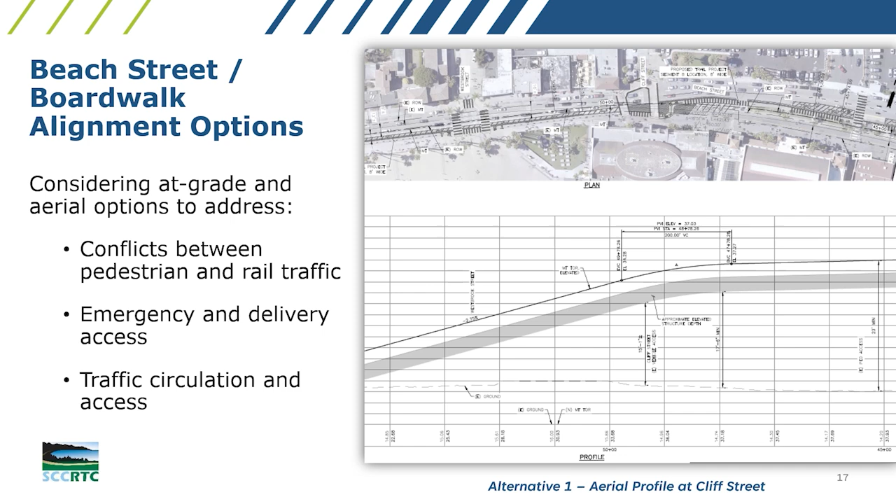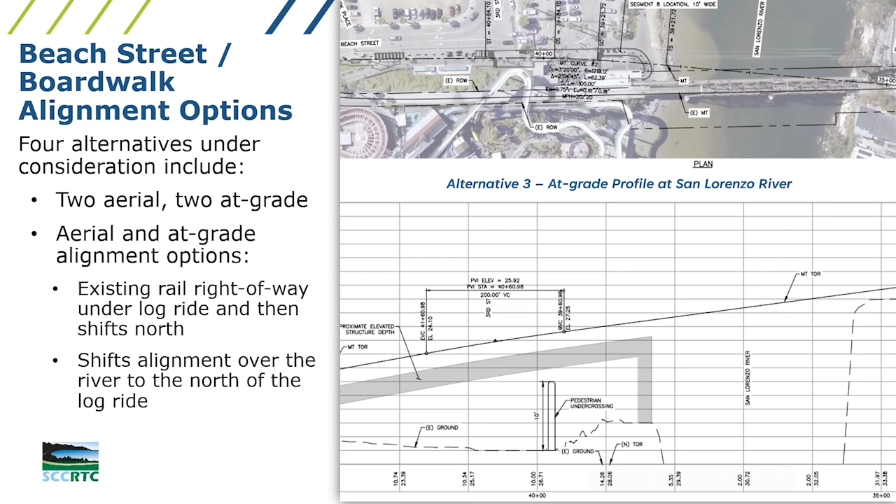In this location, along the boardwalk, we have 4 different alternatives that we're currently evaluating. There are 2 aerial and 2 at grade, one each for an aerial and an at grade, looking first of all at following the existing rail right-of-way under the log ride and then shifting slightly to the north, coming back into Beach Street. And then the second location actually shifting to the north as the railroad crosses the San Lorenzo River to the north side of the boardwalk and continues through in that location to provide more space in front of the boardwalk for a lot of the activities that we were talking about.

These are those alternatives on the map in front of you, looking at both the location where we would stay within the right-of-way, as well as then pushing the railroad further to the north, away from the immediate front door of the boardwalk in that area, opening the space up for more pedestrian circulation, as well as the delivery and emergency access that we talked about a moment ago.

In both of these alternatives, as we move to the west, just past Cliff Street, the railroad stays on the coastal side of Beach Street until it gets over to Pacific and moves back into the dedicated railroad right-of-way to provide for smoother operation of vehicle traffic along Beach Street, as well as in and out of the properties that are on the north side of the street, including the upcoming La Bahia Hotel that is within those blocks.

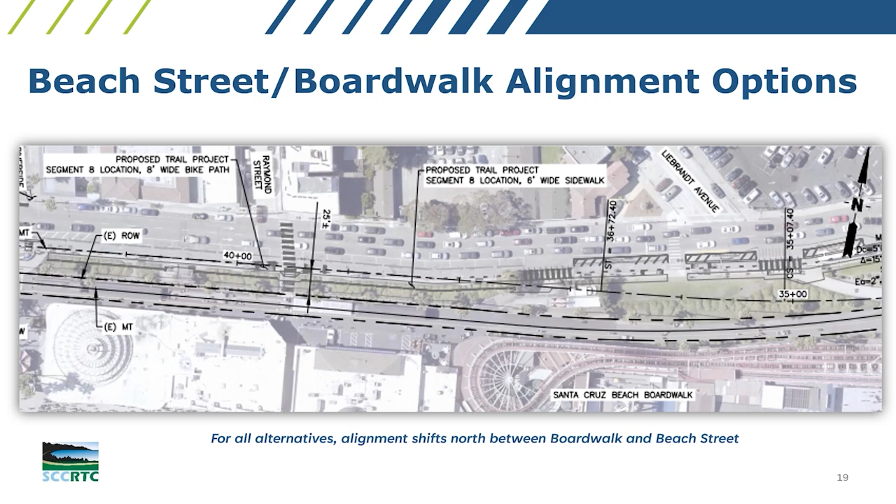In the area of Jade Street Park, we're actually looking at taking the trail out of the railroad right-of-way through this area. For those of you familiar with this area, in the area between 30th and 47th Avenue, we need to provide a high-quality trail, but the railroad right-of-way is very narrow through this area, and so there's some conflicts in terms of being able to provide the needs of both the railroad as well as for the users of the trail.

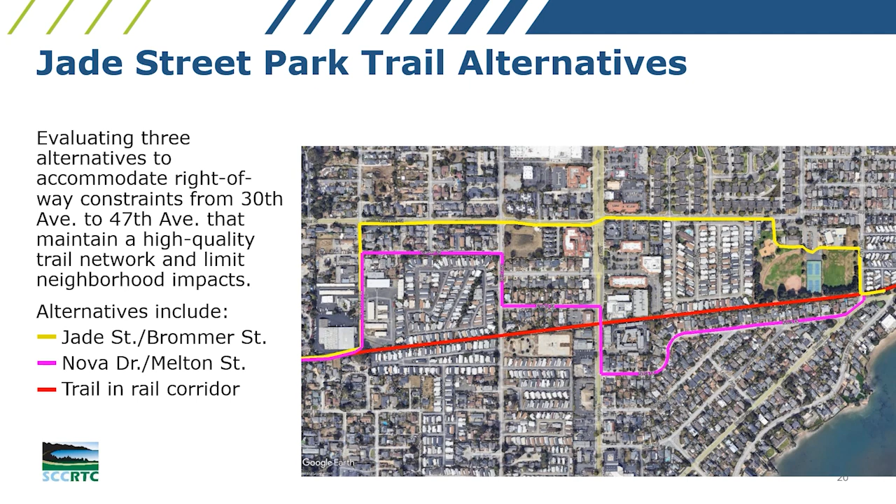So we've got a couple of on-street options that we're considering here that would allow us to provide that high-quality facility for the trail, while also being able to accommodate the railroad within the railroad right-of-way and not having conflicts within that area between 30th and 47th. But we are still also considering looking at how we could accommodate the trail in the rail corridor with the railroad.

For trail segments 13 through 18, there's a couple of areas where we're also looking at taking the trail off of the railroad right-of-way to better meet the needs of the users of that facility, as well as to reduce conflicts, as well as some options we'll talk about where we're taking the railroad out of the railroad right-of-way to leave the railroad right-of-way as a travel way for the trail.

In the area of Sumner Avenue, we are looking at taking this on the adjacent roadway along Sumner because of the number of conflicts that exist with bridges and other structures with many of the crossings that occur through this area. As many of you know, where some of these bridges and structures are located, it'd be difficult to get from the trail down to a public roadway if you were using the trail system. And by putting the trail on the public roadway in that area, we believe we can provide better access and more continuity for the trail through that area for those who want to use it.

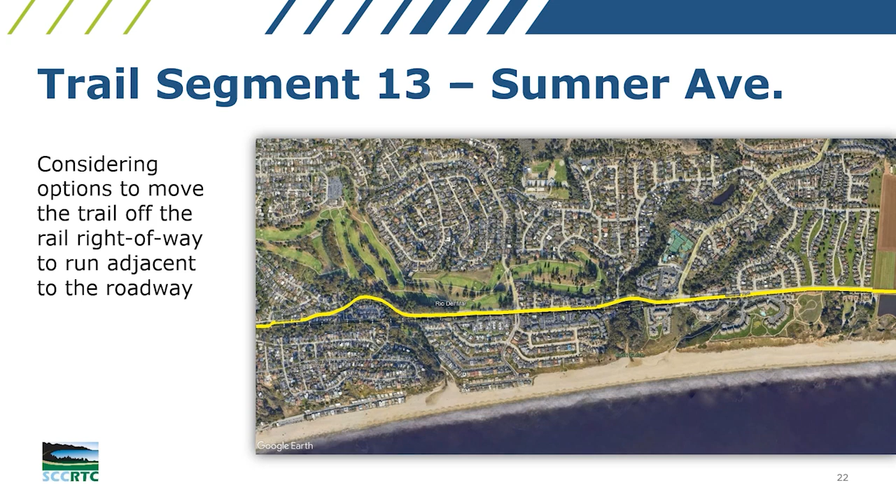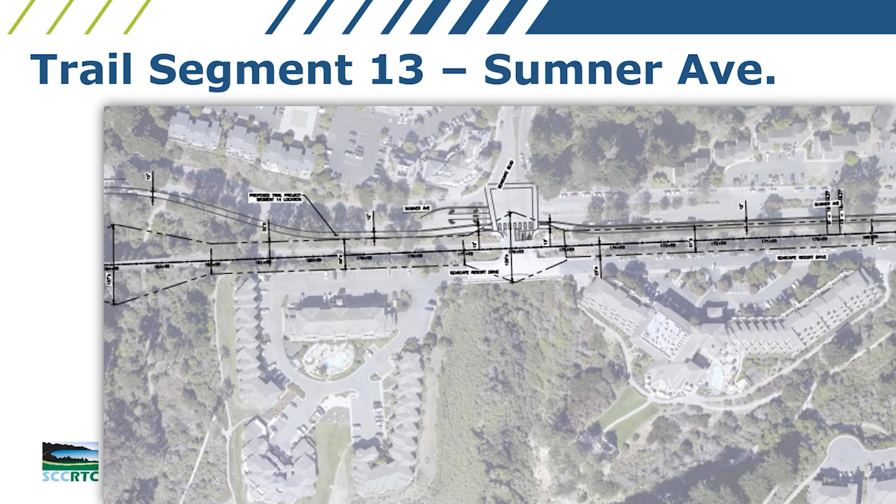In doing so, we would also be looking at a number of locations where, because of access to facilities or existing intersections, we would need to do some reconfiguration to ensure that there's safe operation of the traffic intersection while providing protected crossing for the trail users, as well as for the railroad and safe access in and out of the locations that are along those segments of the corridor.

Segment 18, which is the segment that goes into Watsonville, is one that we're looking to prioritize as a commitment to fulfill providing some of the trail network in that section of the county. And one of the ways that we're looking at doing that is taking the trail off of the railroad right-of-way, particularly in that area where it comes into Watsonville, and following some alignment options that follow West Beach Street.

The benefit of this is that there are a number of railroad spurs, access points into industrial property along the railroad corridor that from a trail perspective are very difficult to cross. We can't necessarily cross a railroad switch easily with a trail. An ideal way to cross is at a perpendicular angle to the railroad. So by moving out of the railroad right-of-way and over to West Beach Street, we'd have the ability to provide a continuous trail that is not interfered with by the regular crossings or the switches in and out of some of the property that have railroad access along the corridor.

And where we begin and end that is with the intent that segment 18 begins at San Andreas Road. We would then follow that up into downtown Watsonville or the area of the depot and look at different alternatives, Lee, Ohlone Parkway, or Walker Street, as the path that continues through that area of the city of Watsonville.

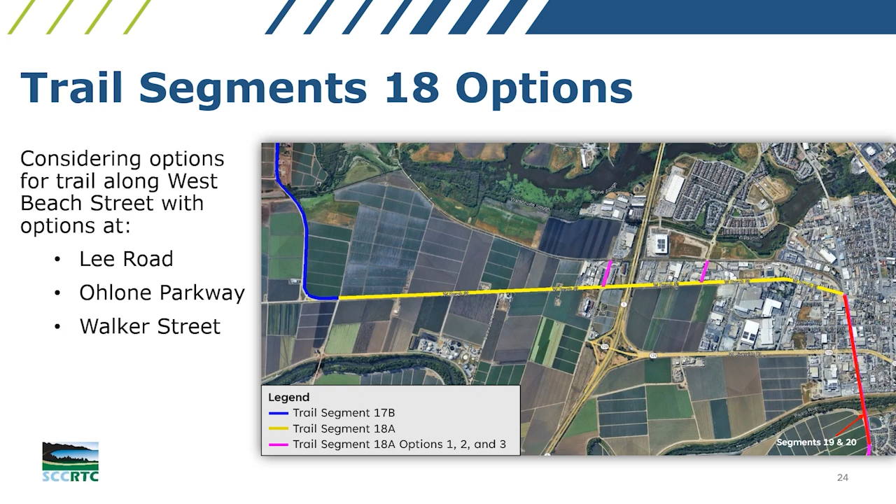And so as we were looking at ways that we could straighten some of these curves out, one of the alternatives that we came up with that we're presenting is the idea of taking the railroad out of the railroad right-of-way, taking it up closer to Highway 1 at the intersection of McGregor and New Brighton, providing the station for Cabrillo College in that general vicinity in a way that would provide better access across Highway 1 for users of the facility, users of the railroad, and the ability to access Cabrillo College from that location.

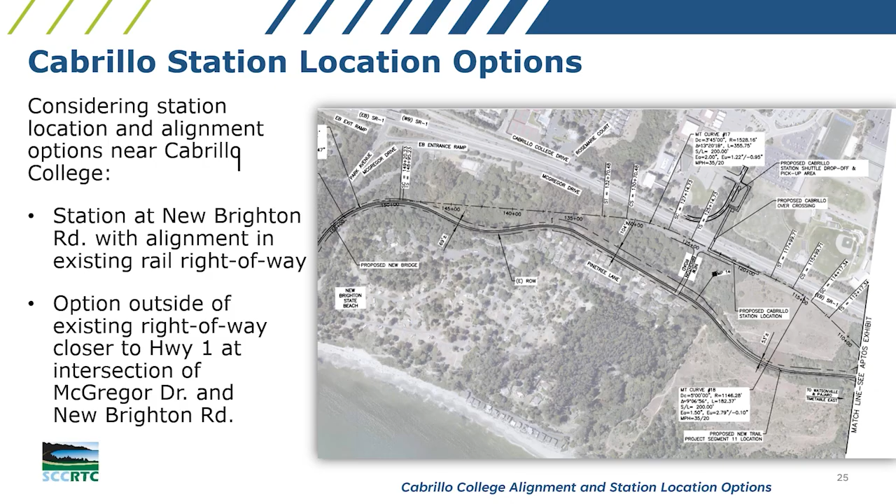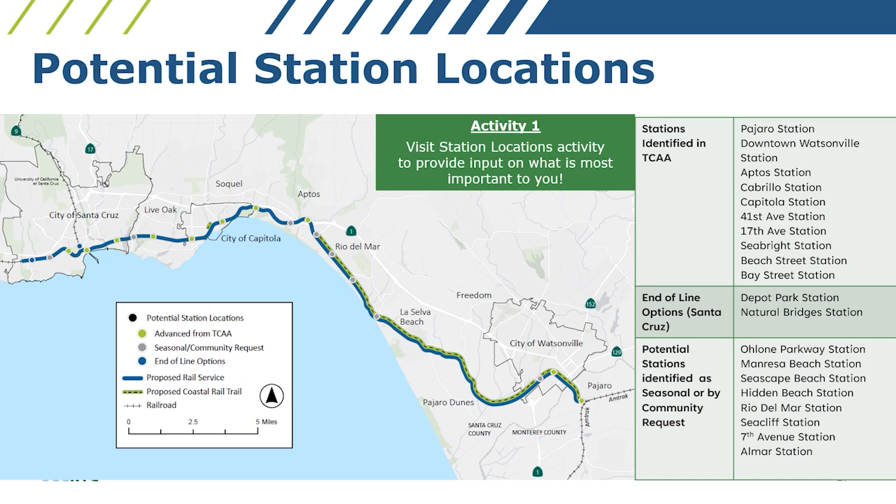We don't necessarily see those as stations that would be in operation 365 days a year as a part of a regular rail service, but they are stations that could serve a need during peak periods of demand, for example, on weekends in the summer. And so as we go through the exercise of evaluating ridership and look at the cost-benefit trade-offs of the number of stations and the travel time along the line, we will be looking at a couple of these locations as well. And we're interested in your input on those as a part of the conversation in this open house.

Station locations will be refined and determined based on a number of factors: the evaluation of ridership, understanding railroad operations and safety. Are they in a good location for safe access, not only for the passengers of the train, but also for vehicle traffic in and out of a station location in terms of site access? Is there good transit connectivity to Santa Cruz Metro, as well as the ability to have connectivity to various parts of the community and provide equity and access to the transportation service provided by ZEPRT?

We also look at the engineering feasibility. It's important or key to have a platform located along a tangent of a railroad as opposed to on a curve. And we'll also be looking at some of the adjacent uses to understand how people in adjacent areas would be accessing, or the types of uses that would complement the presence of a railroad station and the access to and from it from people who would use it on a daily basis.

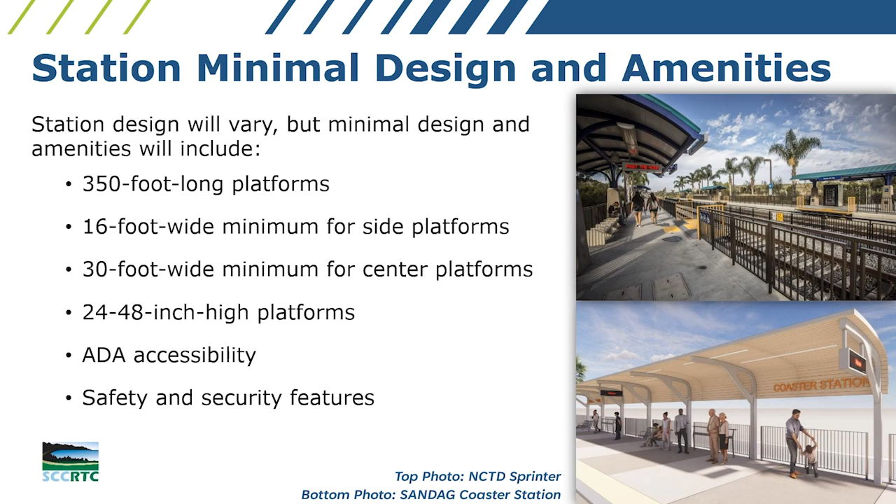When we look at the stations, there are some minimum criteria that we have to keep in mind as it relates to the length, the width, the height of a platform. Those things are all in part dictated by the length of the train, dictated by the width in terms of what we have to provide for ADA accessibility and maneuverability on the platform, as well as having safe space adjacent to the track for passengers to be away from the operating railroad, and also providing lighting and visibility and other things that ensure the passenger's sense of safety and security when they're using the system.

In addition to these basics, we also can look at and evaluate a number of other amenities. And these are the things we'd like to hear from all of you about what's important to you in the use of the railroad. Is shelter an important element to provide, as well as seating, parking, depending on the location, as well as the ability to have kiss and ride or drop off area adjacent to the site. We also have to look at how ticket vending will be accommodated. Will it simply be a mobile service that you carry on your phone or you buy a pass elsewhere? Or will there be equipment required on the platform to enable you to buy a pass or a ticket once you arrive at a platform before you board the train?

We typically also like to provide wayfinding or public information for people to understand how to use the system to get where they want to go, or even to understand wayfinding from the standpoint of if they've gotten off at a station, say in Aptos, and they don't know the area, it would give them wayfinding as to the things that they might want to do, the locations that they want to go, or the services that are available to them nearby. We look at ways that we can accommodate bicycle parking as a part of stations, as well as how we can provide connections to and from the coastal rail trail in those areas where the rail trail may not be immediately adjacent to the station or to the railroad.

Finally, one of the other areas that we heard a lot of concern and question about during Milestone 2 was the conversation about quiet zones. So without giving clear indication of the areas where quiet zones would be a part of the project, because that's an ongoing conversation and part of the dialogue that we're asking for your input on, we thought we'd provide some background information today to make sure that everyone has a good understanding of what quiet zones are, what they are not, and how they can be put into effect as a part of the project.

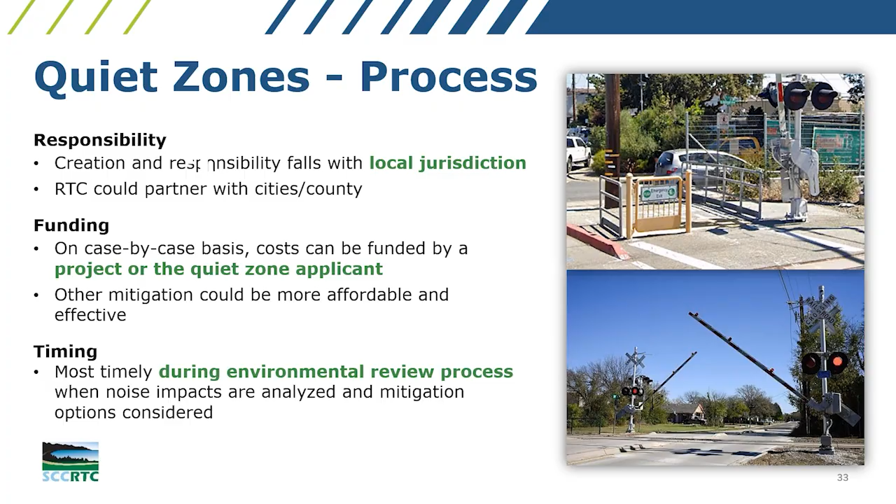So as you think about this project, and as you provide input through this open house, we would ask you to think about, as you think about a quiet zone, what's most important to you in terms of the ways that that might get addressed, as well as understanding and realizing that there is a process that we will take you through. And at the end of that process, if it's determined that there's an impact that should be mitigated, the technical information is done to help the local jurisdictions move forward with that conversation about what a quiet zone would look like in that part of the community.